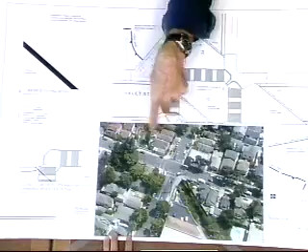Okay, so what's being proposed is construction of the entire bridge and deck, essentially the intersection of Haley and De La Vina, which is what we've shown you.

So I will just go over some of the detail elements, much of which we've shown you in the past. Again, this is... where am I? Yeah, where's downstream? Here we are - this is the downstream side. So the entire intersection is being reconstructed, as I indicated.

This will be the downstream bridge railing and the upstream bridge railing. The railing design itself has already been approved, and just for the sake of review, this is the design that's incorporated in the final plans. This was already signed off, and I should point out that this will all be done in plain gray concrete, which is in contrast to what's being proposed on the deck of the sidewalk, which is a Mesa buff color matching the Chapala Street design guidelines, which is what we'd agreed to.

Can I ask a quick question? Yes. Is this a relief or a shadow? Yeah, these are reliefs.

This is a shadow relief of various steps. This particular configuration of the date, or what ends up being constructed, reflects the historic date that's on there now, as I remember.

Yes, in terms of font, font size and size. So this looks to be flush right through here, which is this and this. Yes, this and this, and then this looks to be a one recess, and this looks to be a double.

Where's the second? So as we start from the bridge deck here, this first band here is flush with the bridge rail. This band here is the first. This band here is, I guess, that recess. We've got 1 and 2. Is that right? 1, 2, 3. 1, 2, 3. You're just missing a line.

But this looks all in one plane. In order to do that you'd have to have enough space for that. So would this then just come straight down? Right here, it looks like it would, yeah. Okay, so this section would be here.

And are those perforations, or are they? You're talking about in this field here - yes, this is daylight all the way through.

Oh, there's just one depth, not two, for this to work, I guess. But he's saying that there's two, and there's going to be a line drawn vertically down here that isn't drawn on the plans. Which way do you want to go with it? It's got to be one or the other.

That would make this one a double depth, and this a single depth. In order to accommodate this, we could have one at 8 inches, and then the remainder would have to be at the same depth in this zone here. So I guess we'll have to rethink this. It works here, but we don't have enough room here. So I don't see it being boxed out like this, no.

Okay, so it's just going to be one reveal, the way Chris drew it. Okay, and what would that depth be? Just to talk about it and note it on the plans - is that an inch and a half? An inch and a half. Couldn't it be 3?

Pretty thick. There's a lot going on inside this bridge rail. There's structural considerations. So as we come into a 3-inch cantilever, this rail, which is pretty substantial, is starting to be undercut by quite a bit.

Okay, so that is the railing design. And then as a review, the corner sidewalk paving, all four corners, has this 4-foot by 4-foot diagonal score with ceramic tile insets.

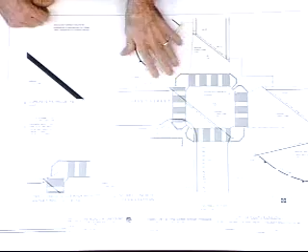And if you remember, what was being proposed and was accepted by the board was that we were going to go to VAPP, Visual Arts and Public Places Committee, and we were going to initiate an art exercise whereby local school children would take 4x4 ceramic tiles, paint them, glaze them, and fire them, with designs reflecting the fact that Mission Creek is running underneath here. That's what's been proposed all along. And so we can come back with some examples of that if you like.

Again, the deck itself is a mesa buff - it's sort of a real pale color in this area here, I'm talking about this. So this is a contrasting color to the deck.

I mean, it's integral color matching the Chapala Street design guidelines, and that's what we talked about. This contrasting to the deck - this is the deck, right? Well, this is - yeah, this is the bridge deck. And this will be concrete, exposed concrete.

Okay, so you've got asphalt to here. Right, and then if you remember, we had another little sort of art element - a 12-inch wide band of plain concrete on either side of the bridge deck, and that would be given to an artist too to do sort of a bas relief, artistic design reflecting creek-like elements as well. That's the intent.

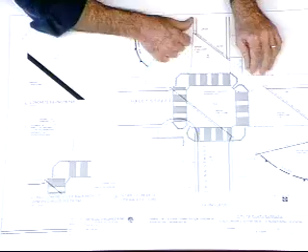Then I should point out too that, although they're not shown on my plans, but you'll probably find them in there, there will be both street lighting at this corner and this corner, in addition to traffic signal poles, and you probably find them in there.

And just for your benefit, this is design proposed as sort of the city standard with the composite concrete poles and the Lumec Domus fixture. All right, that'll be integrated as part of this overall design.

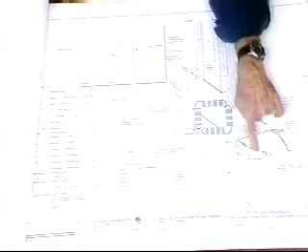In addition to the bridge structure itself, there will be transition walls here, here, here, and here. As indicated before, they will be constructed with concrete with an ornamental form liner that will result in this look. This has not this cap though—it'll have a large stone-like cap with a 2-inch reveal on the creek side.

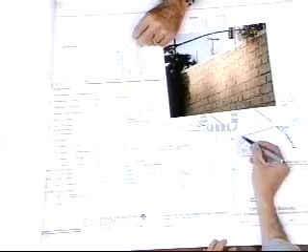This is what we're using down at the Cabrillo Bridge Project, which was approved most recently by HLC. This is essentially what it looks like. This reflects the historic sandstone block that's up and down, here and here, on all four corners. They're called transition walls because we're transitioning back into the creek corridor.

I think that takes care of most of the major hardscape elements. I should point out there is also metal fencing being proposed. We have to be able to secure these areas and provide an opportunity to keep people from getting in here and falling into the creek. What's being proposed by the city is 6-foot high black chain link that comes from here.

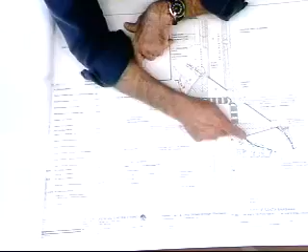At the back of the sidewalk and then down here at the edge of the transition wall, and also at this location here. Also at the top, all the transition walls have chain link along the top, and then at the back of the sidewalk here, down to here, interfacing with existing board fence, which is the property of the private landowner there. And on this side, there is existing board fence.

I don't know if we have pictures of that, but maybe show it now. We certainly do here. It's a 6-foot board fence, like 1 by 12s—I think they are 1 by 10s. That will come, it's not shown on my plans, it's shown on the civil plans, but this is the board fence here.

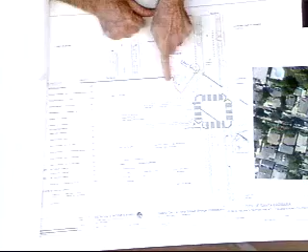And it'll come here, then down behind the last pilaster of the concrete railing, and then along the transition wall, like this one. Right now there's an existing block wall here, and that'll stay, and then they'll construct a new board fence at the top of this transition wall here. So these will be private property spaces here and here, and adjacent to this one here.

Can I confirm—not only is there a 6-foot fence here and here, but that 6-foot fence would also exist here and here? That's correct. These are board, wooden fences, and this is wooden here too. Today there's an existing concrete sound wall here, and that sound wall will be reconstructed to secure this property.

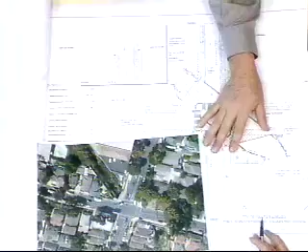So you're landscaping behind the 6-foot high fence in these cases, yes. Why the fence in front of the landscaping? Well, there's a concern from the folks in the neighborhood to secure these spots so that transient folks don't set up residence right here. That's the purpose for the front fence. Certainly the back fence—we've got fairly high transition walls that you would need to protect folks from, because this fall is on the order of 10 feet.

Are we in call for questions yet, or are they still making their presentation? Still making my presentation. I thought—sorry, I interrupted. Okay, what's being proposed in terms of fencing.

This is the planting plan as well. I think it sort of speaks for itself. Essentially what we're doing is a riparian planting. We have sycamores, and per one of the comments, there's an oak tree that'll go here at this little triangle. If you look at the plans, you'll see all the sizes are 1 gallon, because it's our intention to contract grow the material so that we will have genetic purity in terms of the proposed plant materials, not unlike what we're doing down at the Cabrillo Bridge project.

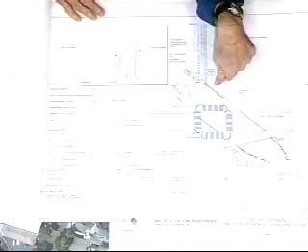So we just didn't want to use conventional nursery stock—we wanted to make this an authentic riparian revegetation plan. In addition, we have standard 24-inch box trees on Haley: Stenocarpus sinuatus, the firewheel tree, here and here, augmenting what's there with the same species. And up and down on De La Vina Street, we have a specimen to match the Podocarpus that exists there now.

And in the parkway strips, as indicated by this diagonal hatch at these locations, that would be stabilized DG. All the trees in the street would have root control barriers. This is just irrigation and detail. I think that completes the presentation—open to questions now.

Do we have a public comment?

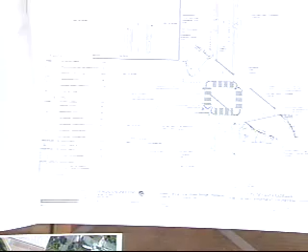Opening for public comment. We have one letter in opposition from Ms. Paula Westbury. Seeing no one in the audience, I'll close that portion and bring it back to the board for questions.

I guess our first question is, Dawn, you had a question? Actually, they kind of answered it. Mine's going to turn into a comment. I did have one other question, but go ahead, Chris. Can I make one more comment? It has to do with crosswalks.

I think there was a request to maybe redesign them, but based on conversations the city has had with transportation, and given the number of kids that traverse this area, the city preferred to keep a more conventional standard crosswalk configuration, since anything different might invite confusion, especially given the school buses and city buses serving school children along here. They thought it best to stay with standard convention considering the heavy volume of bus riders at this location. And this is painted striping? That's right.

Okay, thank you. Other questions on the board? Keith, do you have a detail of the relationship of the chain link on top of the transition wall? It's immediately in back of the transition wall. The transition wall is a reinforced concrete wall, so it butts right up against the back of it. I should point out that the wall terminates behind the pilaster at this location, so it doesn't come up at the end of it. And I believe there's going to be a gate shown here too at some point.

Was there any cabinet furniture, i.e. trash cans, included on this project? The trash receptacles are hard to see, but here's one in this very foreground. Those are going to be maintained. Where were they located on the plan? I didn't see them, they might be too small. They're not shown on that plan. They call it cabinet furniture? Oh, that's for traffic lights, those are existing and will remain. The trash can, one of them, is the one that was in that picture right by the bus stop, right here. That's the one that comes to mind offhand.

Is there any near where the creek would be, on either side where people would walk by the creek, to keep them from throwing trash into the creek? I suppose that could be included. I think you're talking corner about like this. There's plenty of room, I think that's a good suggestion. City of course has their standard trash cans, so just order another trash can as part of these plans, sure.

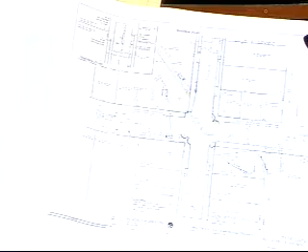I have one question. Just for David, when you mentioned the arts program was going to do a glazed ceramic 4x4 tile, is that going to be too slippery? I think we'll probably integrate some sort of non-skid finish on it, which you can do in the glaze. Okay, yeah, I'm aware of that. We'll make sure of that.

And then the diagonal is just that buff-colored concrete? The diagonal in the street? Yes, that buff-colored, Mesa buff and Mesa colors. Which is what you see on Chapala Street now. Right. Other questions, Mr. Chair?

So David, we're trying to figure out the significance of talking about riparian plants when, in fact, that whole planter appears to be at sidewalk level, and it's really not related to any natural riparian environment.

Are we... this does slope down, does it not, Scott? It has a small grade across it here, but it's certainly not down at, say, the elevation of the water surface. It's not even close to the creek?

No, right. Well, this is something I think the city is promoting as well. I've done projects—there's one down by the railroad station on the other side of the creek—and we're probably 15 feet above the water, yet we're being asked, along a 20-foot buffer, to provide riparian plantings. So I wasn't going to ignore that fact.

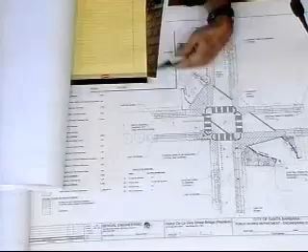So this is our best effort, particularly in an area like this that's going to get little or no maintenance over the long run. We'd like to see it have some relationship to the creek. Ultimately, if the Corps of Engineers comes in and widens the right-of-way of Mission Creek, all the planting on either side is going to be native riparian material. So I'm just trying to be consistent with that.

And so even though you're trying to create a riparian environment, you're still proposing irrigation? Well, at least initially, yeah.

The work we're doing down at Cabrillo, just adjacent to the parking lot at the beach house, on the north side of Mission Creek, we have drip irrigation in there. Then south, downstream of the bridge at Cabrillo, we have an irrigation system set up for the establishment of all plant materials—not to say we can't turn it off later on. That's the way it's done, based on my most recent experience doing this kind of work.

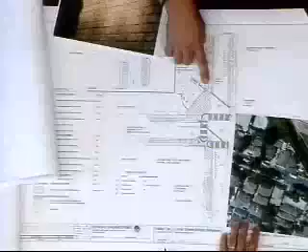You just mentioned the oak tree on the De La Vina side, that one right there, that the fence is going around. Is there another fence for protection from the creek? Originally, the sound wall that we see in this aerial photo, when I say originally, today there's a sound wall that butts up against the bridge rail. I don't know if you can see it, it's in this little tiny picture right here. Can you see how the sound wall is touching the bridge rail? Yeah. What we're going to do here is terminate the sound wall at this point, and it's going to turn along this purple line here, so that we have a way to get at that tree to maintain it. Then this little space right here is a chunk of chain link fence, so we can get at it, between here and here. Right, so there's that, and that's being proposed at 6 feet. Right, to match the wall. It'll have a gate on it to match, or something? Yeah. Okay.

Okay, comments. Mr. Chair, I still have a question.

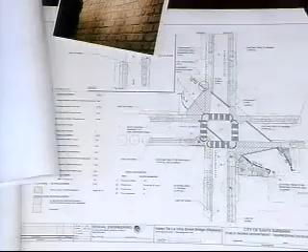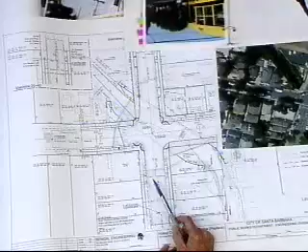Okay, Gary. Yeah, it looks to me like on 136 and 132 West Haley Street, you're going to be removing some fences, and it looks like there's 6-foot fences. 136 West Haley is on the upstream side of the bridge. I'll make sure everybody's with me here. This way is uphill towards the mountains, Brownie's Market, stream going this way. This parcel right here is 136 West Haley. Next door to it, towards Chapala Street, is 132 West Haley. In regard to removing the fences, the building on this property is being purchased. Are you aware of that? No. Okay, the whole parcel is purchased by the city for this job, and consequently the fences will be removed so that we can have room to stage. But afterwards, this fence that goes back in will be just like it is today, which is primarily only about 3 feet high, or 3 or 4 feet high. Next door to it is a 6-foot fence. And how far is that 6-foot fence off the property line? It's right on the property line. And that property's not being purchased, right? Right, that's the 132. Is that the one with the dog? That's the one with the dog, yeah.

Is that why you were asking that question? There's a mean dog, maybe more than one, behind that fence. I'm asking because of how close that fence is to the sidewalk, right up onto it. But they're not doing anything on that parcel.

We're removing the fence in order to reprofile the roadway, to get it to match the bridge. So yes, we're removing the fence, but the one that goes back in will be just like the existing one. Well, the fence is non-conforming, is it not? Yep.

It's a non-conforming fence. How tall is it? I think it's on the order of 6 feet. Oh, it is, okay. It's not conforming. It'll have to be dropped down to 42 inches.

Yeah, I think from right-of-way negotiations with the neighborhood, in order to come to terms with this property owner, I believe this is the deal that you needed to make with the owner, right, James? That was part of the right-of-way negotiations.

Just to clarify, the deal was the owner knows it's going to be a 42-inch high fence. At the end of the day, other way around -- we wanted to go to 42 inches, right? 42 inch, yeah, 42 inch high fence. That's what we wanted to put in, but we were heading for trouble.

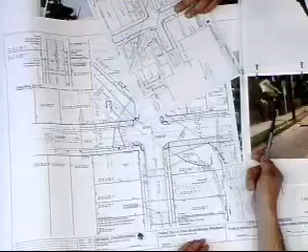During construction, we heard about those dogs. On this green line here -- I don't know if you can see it -- this is a temporary construction easement. We're going to build a temporary chain link fence to contain those pets along this line. Our contractor is going to do that. Afterwards, the way the project is set up right now, the fence will be built right back in the exact same configuration it is in.

I just don't see how the city's going to allow you to do that with your permit, because everybody else has to lower their fences during construction. Right, so I think you're going to need a mod.

Well, actually, why don't we just say that this is a staff deal and not an ABR issue to resolve? It's an aesthetic deal. I think it adds blight to that corner.

Well, one thing he said was that the homeowner was going to be building back the fence. No, his contractor is building it back -- it's part of their deal, part of their contract, part of the scope of work, to allow them access to the site.

I'm not really opposed to the 6 foot high fence myself, but I'd like to see some relief and some landscaping on it. If it was covered with creeping fig or something like that, it would look green rather than a tagging wall. I think it would be a little bit nicer. But if it's a fence right on the sidewalk, I think it adds to blight in the neighborhood.

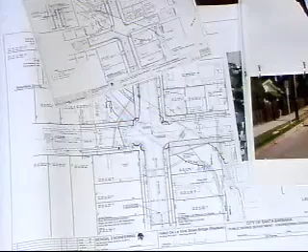This is what we have. Exactly. Of course, if that property's ever sold, zoning would make them remove it, or at least knock it down. Or if any work was done -- which there is, which is what's triggering all this.

We'll just bring it up in the minutes. I think you guys will have to deal with that in the permitting process. I think we'll have to defer to the city on that -- they're the ones that headed up the negotiations with the property owners.

So, although this isn't part of your question, the same creeping fig idea is incorporated where we can, on 513, where we're going to have a concrete wall right there. That fig is included in the project for that exact purpose. Yeah, it is.

Mr. Chairman, I have a question. On the buff tile, can we make a comment on that, or has that already been approved and set in stone? I'm a bit confused.

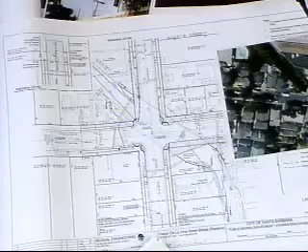The minutes said we were comfortable with the coloration we were going for. By coloration, I mean the pattern itself, the overall design of where the tiles are. It's not really tile, it's concrete. Well, the concrete patterns -- the concrete color is to match the Chapala Street color and pattern. That's what we have. So can we comment on the overall design of it? That was my question.

Okay, so if this is the color and pattern that we have at Chapala Street. I'm fine with the color and pattern. I'm talking about the overall layout of it, how it extends. I'd say go ahead and comment.

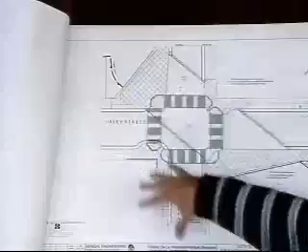We don't even know there's a bridge over there. This is kind of clean, and here's an intersection. How do we make this intersection look more exciting, even though we don't see the bridge? This being artwork, I don't have a problem with all this. My concern is this finger going out here and this floating over here. Is there some way we can make this look more like a four-corner intersection? That's just an observation I'm asking, and I'd float that to the landscape architects to see if they have an issue with that. That's just my question.

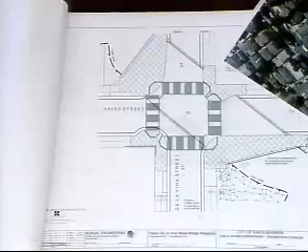Well, I think you bring up a good point, but given the constraints we have in terms of private properties, it's a little difficult. If we were working with a blank slate, I'd say fine, we could do that. But was there a way we could still have concrete coming here and make this look more like a corner? I'm just trying to throw something out and let them jump in if I'm out of bounds here.

Well, I think that portion of the review we actually went through in the earlier stage, when we had a lot of discussion on the odd shapes that were happening. I think we all came to a consensus that we have a difficult situation to work with here, and the board had reached a consensus that what they are proposing now in terms of the massing was acceptable. Okay, that was my question, so we've passed beyond that stage, but I understand where you are. Am I right? That's what I recall, that we went over that in quite a lot of detail.

But for the sake of discussion, I think this is a vast improvement over what's there now. One thing we notice is you can't even tell there's a creek running under here, that there's a bridge. The fact that we're taking this house out and reinforcing the visual aspect of the bridge railings gives a much nicer relationship between the two, such that you can actually read that it is a bridge. And the fact that we have a concrete deck as opposed to everything being asphalt will help reinforce that. And the fact that it's off center, the way the creek comes here and then slides back here, makes it tough.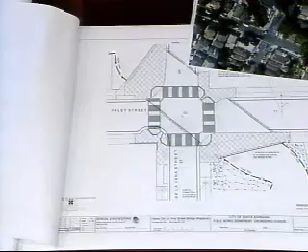Okay, Darren. I'm very supportive of the city's environmental policies and their direction for planting native and riparian vegetation. However, I do feel for this project, at this time, we have not started the project to turn this into a widened creek. We have, though, in Cabrillo.

We have? Yeah, okay, Cabrillo, just last week we got HLC approved. It's like a total riparian planting down there, not like what we did at Borough Beach. So what you're saying is this section is going to follow that in a timely manner? Because for me, reviewing this, we're not looking at an application to turn this into a riparian habitat. It's not there yet. That's not what's on the table. That's not the project we're reviewing. We're reviewing walls, fences, bridge, hardscape, and landscaping.

Correct. I'm kind of struggling here because if I'm asked to believe what's going to happen in the future, I look at it one way. If I'm looking at what's on the table today, I look at it differently. So what's on the table today, my comment about the landscaping is, even though I'm very supportive of the riparian palette and direction, the landscape opportunities in this project, as shown on the plan, really relate to the urban neighborhood.

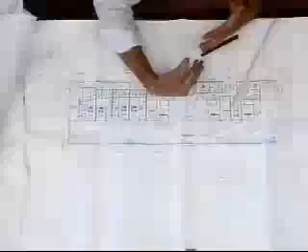We have a block up at this end where we're right at the zero property line—that's our northern property boundary—and then the rest of the neighborhood starts to fall away and has more setback. We looked at that and saw the opportunity to essentially establish a line for ourselves from the corner of this building to the corner of that building, and formulate a setback line to establish how to approach and fit in. Keeping in mind this is a C2 zone, and the requirements in this zone are a zero setback, so what we did was apply an R3 setback at a minimum on all sides except where we already have a zero setback in respect of the neighborhood.

We also went away from the double-loaded corridor and went to a single access point down this side. What that did was help pull us away from these buildings. We now are against this wall, that's the zero lot line on the north, and then putting a break between two buildings rather than one, so that there would be ample light into this light well.

This light well is a slightly different case where we've provided a light well, which you'll see in our massing wedding cakes back up and away so that the light, and we'll have an analysis here in a moment that shows the light going into this light well. By the way, the existing light wells are slightly different in the field, so we'll get into that a little bit more too. These are now a mixed-use situation.

I shouldn't say mixed-use so much as this is the Santa Barbara approach to live-work, where we don't have communicating access from the commercial space in these three units. Each of these three units is a two-bedroom unit. The rest of these units, the four units at the back, are one-bedroom.

One of the things that we've done, and we've checked this out with the parking people and traffic folks, each of these garages is a tandem parking garage so that there's a device for stacking. You probably started to see this more and more, and so I have the details on that.

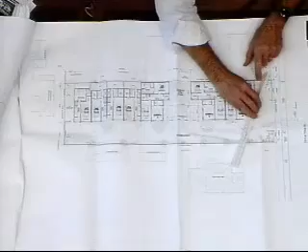We've taken, like I say, the opportunity, and you'll see this, I think, a little bit later in the illustration, of looking at the texture of the neighborhood. There's right now a hedge that goes around this side. There's already a small wall here and here existing. And we've taken that kind of concept and some hedging into account for the future look and feel of the building. And again, what we tried to do was mass against the existing building.

Here we have a duplex at the back. Actually, it's a residence. I'm not certain it's a duplex, but there's a residence at the back. Kept a 10-foot setback at this property line and yards.

In terms of statistics as compared with the previous project, it's a 21% decrease in the gross area of the building, a 10% decrease in the footprint, and a 125% increase in landscaping compared to the other one.

So that single loaded aspect really helped, and also going to the single car stacked garages helped a lot with the texture, the feel on the land.

As we step up then in the building, we also cake back at this end. I want to point that out at all ends. So you'll see more up.

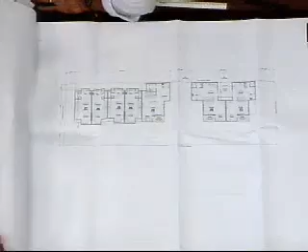Should I turn that off? Yes, turn it off. There you go.

We have living at the second floor. This is cut back in already, and these have cut back in a bit. And then we have at the third floor bedrooms.

Now, we met with our office, met with the property owners both to the north and south of us, three different times. And as recently as earlier this week, we had some communications with the owner over here, and we'll talk about some options that come up here still trying to deal with these light wells. But this was what we presented to you, and I have one of the things in that packet that I handed out, another option in working with the owners.

What you'll notice also on this is that over at the west end, there's not a third floor. At this point now, we're back 28 feet plus, so we don't go up to a third floor at the back to open this up on this back side. So that's also caking up and caking up.

We move into then some illustrations on A3.0, and this is the massing before the option that I'm going to talk about. Coming down the De La Vina Street side, kind of upside down to it, but this is the pine tree that was in question.

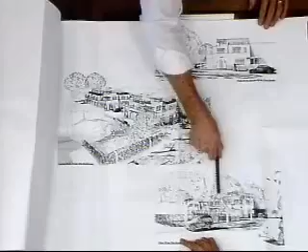You'll see in the plan views we did ease back from the pine tree. We've eased back from the south side in particular, and we've organized the building around this well at this side and staying on the blank walls of the larger building to our north.

At the front edge, what we're planning on doing is continuing on with this hedge concept that ties into the hedge that's already existing next door, and in fact there is an existing fence right about there. Yeah.

More illustrations from different locales, closer in and on the site, but we're taking our cues architecturally. I handed you an update on this, but architecturally, this is a lot of reference to Irving Gill types of architecture, and that's this set.

So this is our real touchstone for history in Southern California, with Irving Gill and some Schindler, with the lighter look for the top of the building.

Where our offices are located, this is Santa Barbara, and our office is up here at the Riviera Research Park. But from around town, if you look at the character of this neighborhood, it's a lot all over the place. This is what we think was the appropriate way to meld in with that neighborhood.

You'll see this sense of the arch form and the Irving Gill take on modern Spanish style, with the lighter weight so that we can get a mix of heavier towards the bottom, a splash of color in these tile forms that we're anticipating, plaster, and then a siding effect and a lighter weight floating at the top. That's the vernacular we're trying to emulate here.

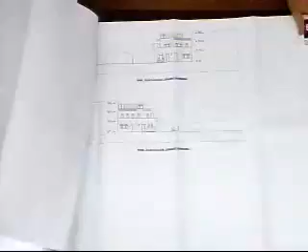Excuse me. See what I didn't collect up on. I think that covers it, except for an option that we wanted to talk about.

In my set, we brought in a building section to show this light well aspect too, because we wanted to study that closer. That's part of the sheets that I just handed out.

Regardless of which option we get to, and I'll explain the difference between the two in a moment, this section illustrates what the well would be in between the buildings, related to the well of the existing building.

One of the things we looked at was if this were a residential site, which it isn't, but if it were, what are the sightline setbacks required for an adjacent site? That's this dotted line right here. What we've set up in our actual design is actually lower and more accessible than that would have been if applicable. We have a winter and a summer, and we got dimensions from the neighbor next door and applied those to the site here.

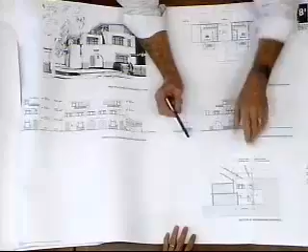There was a concern about, at the upper floor of this unit, having this deck potentially be a privacy issue to this light well, looking back down into the offices surrounding this.

Additionally, early on our first efforts had these blinders, if you will, right next to this light well. We backed them off, and there's always been a concern about the lateral effect of light as well. So to mitigate that, in this alternate, this has retreated backward to this line so there's less of that occurring.

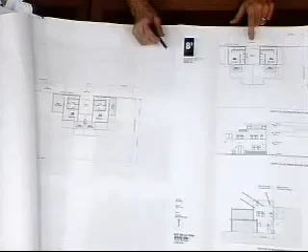There's less of a blinder here. Now it's unfortunate these wells are here, and in fact at this light well there are, I believe, four skylights over the top of it, but I don't know why—those could also be opened up. Unfortunately, it's a zero lot line condition, and I don't think you'd get away with building such a thing these days. But it is what it is, and we've designed around this to the best of our ability, taking into account the balancing act of the neighborhood in all other respects.

So that's where we stand today, and this is an alternative we're prepared to go forward with. The outcome of that in elevation is actually this, which is a little bit nicer architecturally. It takes another 100 feet out of each of these units approximately, but it also cleans this up a bit as it tiers down. So there's not a notch going forward that you would have seen.

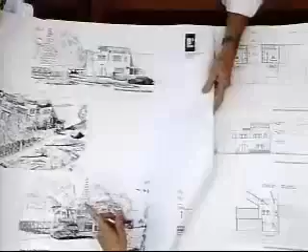And then the other units at the third level, are they similar? And they would retain the option A, which would be the first one? Yeah, these 2 units at the front, which were around this light well, are the only ones that are the change in the alternate we're looking at right now. Further back, because we've been able to get a wider space in this one, we were able to. It wasn't as big of an issue.

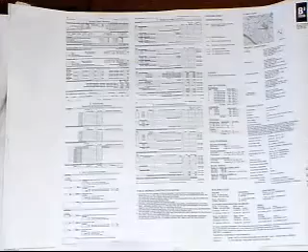Members of the ABR, Keith Rivera, the new architect for this project, and I have been working through many problems associated with the previous architect's submittal, and thanks to Keith and the owners, we've made giant strides toward what I feel would be a good project.

As suggested by the ABR at the two previous meetings, pulling the units to the north property line against the 829 office building is a preferable solution, providing the existing two wall openings on the property line remain open. These two wall openings to atriums provide much needed and appreciated southerly light to 12 offices, openable windows with natural ventilation to 9 of the offices, and a 105 square foot balcony with 3 French doors.

The building, a 55-year-old produce warehouse, was converted by me 30 years ago at a time when natural ventilation and light was very uncommon in offices. I sacrificed 320 square feet of office space, reducing the rental income, to provide offices with these assets, substantially reducing the light and air conditioning loads required for the building, which provides less expensive utility costs for the tenants. The closing off of light and ventilation will increase the electrical bills paid by the tenants, no small matter now nor in the future.

While this proposed project retains acceptable openness to the westerly atrium, the easterly atrium is severely closed off with 3-story buildings on 2 sides, approximately 12 inches from each side opening, and 2 stories on the third. I might add that the third floor building is roughly 5 to 6 feet higher than my highest parapet, which is not what's accurately represented on these drawings.

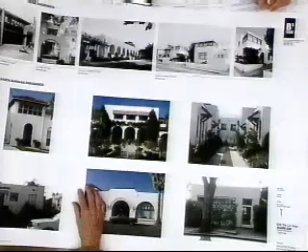So what you're doing is, just so I get this straight, you're mixing a Spanish type of plaster architecture with a Schindler modernist type on the third level. Right. We think it also plays off of this feel that you're getting from the Irving Gill buildings, which was a California approach to modernizing the feel of a Spanish-style building.

Thanks. Can I segue off that same question? Also, I was wondering how these architectural styles that you've chosen are examples or precedents, how the third story element comes into play here, because I don't really see that.

Well, there is actually an extra story of height in this building, if you will. It's a matter of if you're talking size, bulk, and scale, but in terms of usable space, it's not there. I know this building quite well, and you can see this lower—there's essentially an extra story's worth of volume and height and size to that building.

Other questions? Yeah, I have 2 questions, Jim. The tile out in front of the arched wall, is that the same tile that runs throughout the interior of the court?

Show the elevations. You're talking about in plan view? Elevation view. There was an elevation. What page? It's probably off the other. What number? It was on this sheet. Just bringing it forward. This one here?

Basically, I was talking about this tile that's in this part at the entrance. Does that continue the same tile that's... Yeah, so they would have a variety. We haven't selected colors on them, but they're all ceramic tile.

Yes. And then the other question, according to the plan view, it looks like these arches are only 6 inches deep. Is that correct? The plan view is going to be the most correct. That's right, it said about 6 inches, approximately.

Jim? Yes, Paul. The idea or the notion of having stacked auto lifters as your tandem parking—has transportation signed off on that, and city staff has said that that's an acceptable two-car garage? That's correct, yes.

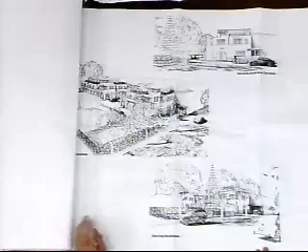Okay, other questions? Okay, no questions? Yep, Sarah?

Did you study having the trash and the recycle enclosure—have you studied an alternative spot for the trash and recycle enclosure that maybe is more internal down the driveway, maybe even at the end?

Well, we could look at that. One of the things is getting the pickup people to want to come down and get there and get back, so the actual function of it from the provider is usually the issue. Well, they will come all the way—it's sometimes a little extra, but they will come all the way deep into the property. So it's a possibility. It's the same size at either end. Okay.

Can I finish? Quick question. Just noting what Mr. Sharp was saying on this building versus the third story of yours, looking at these block elevations we're seeing here—these look almost to be in line. I'm wondering, I don't know what datum he's using. We believe this to be correct, so I'm not really certain where he's deriving the information. So your estimation is no, that's not the as-built of his building? Okay, we believe that this is correct.

That yours is topping out at his parapet height then? That's right. Okay, other questions? No? Comments?

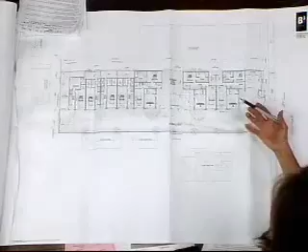These appear to be deeper than they necessarily have to be, so if these were a little bit shorter, especially these, then we could really get something like a little bulb out. I think what you run into there is these dotted lines, which are traffic department requirements. So if that's true, I would almost follow the line of travel with the planter edges, and this becomes maximum planting opportunity right there.

I don't think a fence right here is really necessary. I think that little jog of fence might really interfere with some nice flow of landscaping on the corner there. I should point out that the concept here, if you look at the illustration, will have a bit of an arbor here. One of the things on the side of this building, trying to mitigate the flat blankness of it, was we provided a little arbor right in here, and we want to get something up to help screen the flatness of that.

That's what's represented there. Also, commenting on your comment, where you showed the bulb is one thing, but that opportunity, if you see these dotted lines here, may exist more in here. That's what we would plan to do. We have no desire to put curbing in here either. These lines show a flush line, and this is all pervious paving, and we would get as much actually planted in here as we could while respecting the dictates of traffic. So it's more important to try to maximize the landscaping, especially in this front zone. That is what's more important.

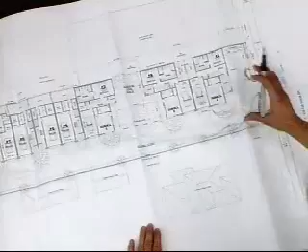My last comment, I just want to make sure Mr. Sharp's comments or concerns were at least looked at. In his third paragraph, while this proposed project retains acceptable openness to the western atrium, the eastern atrium is severely closed off with 3-story buildings on 2 sides. Therefore, I am asking for further reductions in the building mass surrounding this eastern atrium.

Did the board address that concern? Yeah, that's actually what I meant in my comment. I thought it was windows, but it was actually the comment to continue to work with the neighbors on the areas he still had concern with. Okay, so it was that area. So the eastern atrium is yet to be resolved between neighbors and project. That would be my concern. That would be this one. That's this, right? Right.

So there were two. He actually proposed the 2 third floor orientations that have different properties, and one of them narrows, widens the aperture at the end, and that seems to have some benefit. So if that's all satisfied, I may have missed that conversation, but I just didn't want to have it not in a comment at least.

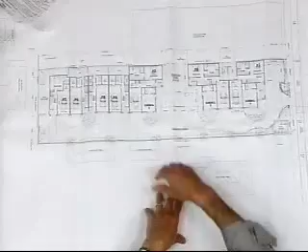The other thing is I agree with Carol on the landscaping, especially along one side where we have this long stretch of very symmetrical plantings. Some maximization of the landscaping area that could give us a bulb-out here or there to make that long corridor feel less straight and directional would be really good. I think the project overall is going in a good direction.

The massing is very good. I like option B on the 3rd floor, which creates a better aperture, a shorter distance to the light, so I like that, the B. I think most of the things we have to address here are landscaping, and we asked for maybe an alternative for trash enclosures, to see where that could possibly be.

Looking at the building elements you're incorporating, try to have them work a little more in harmony. Some of the depths you're using for the windows, a little more depth would be appreciated. Am I missing anything? The garage situation.

Personally, I'm not as opposed to it. I've seen this type of garage used not in Santa Barbara, but in Europe, many places, and people seem to use them quite well. I think it's probably something that's going to happen as the city gets more dense and space becomes more valuable. But again, as Paul phrased it, if you do go this way, there may be other opportunities you can use to maximize creatively. So I agree with him on that.

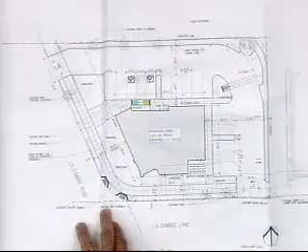As far as the landscape is concerned, there's a landscaping plan attached. You can see we're trying to preserve some existing trees on the property. There are 3 significant trees at the back on the north end, and one tree along La Cumbre Road, and 2 existing palms on La Cumbre Lane. The rest of the landscaping is new.

We're not too interested in the operations. Yeah, the floor plan is the floor plan. Okay, the 4 elevations provided.

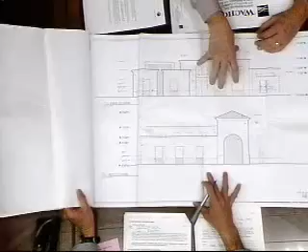The north elevation is actually the main entrance from the north side. This faces the parking lot, right? Yes. So that's this one here? That's correct. So you'll see the main entrance door here. One important concept for Wachovia's branches is that we try to maintain a two-story space, a two-story volume for the public area of the building. So on the interior, that's why you see this element here that's fairly tall.

That's also reflected in the other elevations we get to. There's a clearstory element at the back, set back from the front of the building, that provides natural light so the traditional banking lobby is lit with as much natural light as possible.

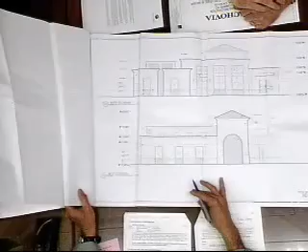The materials, we've submitted some material boards. The principal materials are plaster, with two plaster finishes and a reveal at about 36 to 42 inches high. There are tile features in these alcoves, or recesses, for the windows, and those materials have been submitted for samples. The other principal elements are...

Michelle, do we have a sample board? There should be some color attachments somewhere. I have the black and white ones with me, but I don't have the color. There we go, thank you.

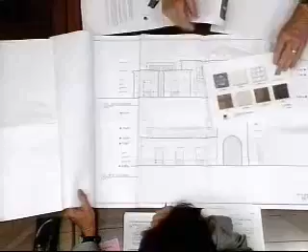This is a color copy, so I won't guarantee it's an absolutely accurate representation, but the colors are sort of traditional. Is this stucco here? That's correct. And where's this one? This is the plaster above. So we really have two tones, this is the wainscot plaster, and that's the one above, and then you have the reveal in the middle. And the tile is in here? Yes, that's the wall tile, the squares are the wall tile, and then we have a decorative tile that appears in locations like here, horizontal.

And you're proposing a one-piece mission tile roofing tile, yes. And this, is it aluminum framing? No, that's actually plaster. These are some metal canopies, I think we have two, one here above the ATM.

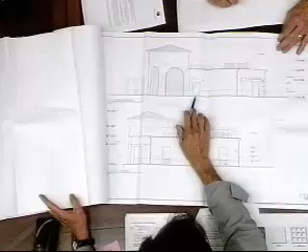We also have some wood trellis materials shown on the other elevations. Here's a wood trellis, that's right. And this is facing La Cumbre Lane. That's correct. And the east elevation facing La Cumbre Road, 26 feet high.

Do you have any relationship in height between this building and the existing building over here? We do from the photographs. The massing is probably very similar. I don't think these buildings are really taller, if you look at the photographs it's a one-story building, the AT&T next door. Just wondered how that height relates to it, because this is 26, this is 27 feet tall.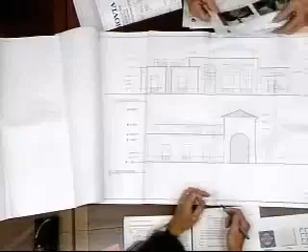The photos of the buildings, in photo number 5 in your packets, show that's the tallest element of the building down La Cumbre Lane. Looking down from our site here, I think that's probably similar in height. I don't know the exact height of the sloped roof on top, but it's probably not too much different - within a good scale relationship.

You have the elevations. This is facing La Cumbre Road, facing the back. Wood trellis - that's the same brick tile that you have, yes.

This is your landscape plan, intended to fulfill the requirements of the city. The existing trees to remain are here, and we're adding more of the same palms along La Cumbre Lane. Myoporum is the ground cover here, and Festuca - I can't read that upside down, I'm sorry. All right, that's landscape looking across.

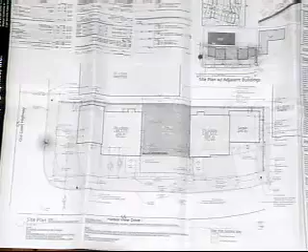Okay, so we are at the corner, 1405 Harborview Drive. Where is this? Old Coast Highway and Harborview. It fronts on the corner that is opposite Montecito Country Club and catty-corner to the tennis courts. So you're right on this corner here? Yes, on this Old Coast Road. And that road coming down here? Right. So is this one or two properties? One here, okay. And it's a duplex, or looks like a detached duplex.

Okay, so this is Old Coast Highway, this is Harborview coming down here. Actually, you can see from the photographs towards the end of the drawing package the immediate environment.

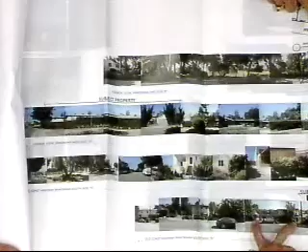As you can see along Old Coast Highway, there are quite a number of multi-unit developments, apartment buildings - that would be these here, Twin Pines, Gala. This is your project right here, subject property. Right next door is a two-story apartment complex, followed by another two-story apartment complex, followed by another one - 1, 2, 3.

Right, okay. So we have location, we have site plan.

Mr. Chair, I actually went through the minutes of the last meeting, and out of the 13, 4 of them were not positive comments in nature, but there were quite a few that would have required at least some action.

Okay, you want to call them out? Do you have a copy of these? You're looking at me like you've never seen these before, Tom. I don't believe I've got 13 comments, but well, maybe we could just go through these.

Let's go through the 4 that you think need to be addressed.

Of hearing the applicant's presentation, that gives me a lot of understanding of the project. So he probably hasn't seen it before? I don't think so. Okay, he has up to 10 minutes. I'd like that time to be used.

Right, all right, we're on the board. You want to go ahead then and make your presentation - refresh the board. Okay, these are two detached single-family structures.

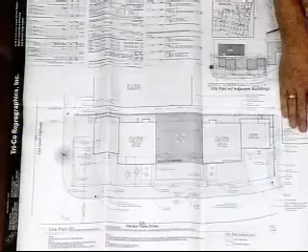The building immediately adjacent is a two-story apartment complex. Again, on the other side to the north is another duplex. The site itself is impacted by flood zone conditions, and therefore the structure to the north has needed to be raised and filled somewhat in order to meet that.

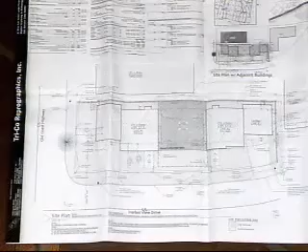The project also was required to pass the requirements based on open space sound requirements because of the adjacency of the freeway. By splitting the two units and kind of harboring the open space in between them, we were able to achieve this without having any exterior walls. Other than that, I think that's really it, my presentation.

Just after opening up, seeing no one from the public - do we have a letter? Yeah, we have a letter from Ms. Paula Westbury. Okay, thanks - in opposition. Okay, and also seeing no one from the public, I will close that portion of the agenda, bring it back to the board for questions.

Actually, Mr. Chair, if we can have Don quickly go through the items that need to go through, to refresh our memory on the motion.

The first one was - I'll just read the ones that required action. In addition, the ones that didn't require any action - I'd like to hear the motion.

Number one, the mod required for the pop-outs is technical in nature, and the second-story location does not prohibit the use of the 1,250 square foot of open space. Number two, the applicant is to verify the heights as required for natural grade per zoning ordinance. The board finds that the project does not appear too large in size, bulk, and scale.

Number three, the applicant is to study window proportions, locations, styles, and variety of uses on the east and other elevations. The board members find the use whimsical and playful.

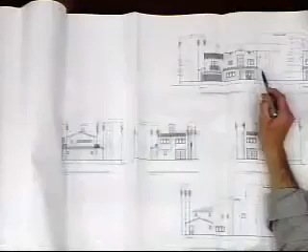Number six was study the master bedroom balconies as they appear to be cantilevered a bit too far. They did not require modifications and were adjusted minutely to meet those requirements. Where are those balconies? Right here. How far out do they come out? They're 2 feet beyond the setback. And where were they before? Inches different, just like 2 feet, 1 inch? Something like that, yeah, it was very minor.

Okay, number 7 was the rear elevation garage of Unit 1 is to match the Unit 2 garage by eliminating the recessed pop-outs. That was accomplished. That was done? Okay.

That comment was some board members prefer that the units have a less mirrored image. Did you? They're not really mirrored. The two ends are handled differently, and in response to stepping down at the edges of the property, one has a hip roof, one has a gable roof. It's a duplex, they're two brothers. It seemed appropriate to treat them very similarly.

So this is the adjacent structure. It's 2 stories, and this is 1 story, and the outdoor areas in either case are side yards. This area here is a parking area, and over here is parking and access to the garage. This is basically the garage corner of that structure. No windows on either elevation of either building.

These are kind of bathroom and bedroom windows upstairs. Where's that? It's here. So the two-story apartment building would be right here, and then this would be their parking lot. And then facing the neighbor over there is this one.

This elevation - I think the comment was to show where the windows are of the adjacent structures and how that relates to the windows of your structure. The multiple unit dwelling has a modulated system of bedrooms. There's I think 4 units up there, so they just kind of go down the row. They're not specifically related. There's 4 two-story units, and the upstairs bedrooms and bathrooms have their rear windows looking out in that direction.

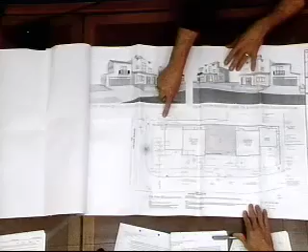This structure is a multi-unit, and they're up and down units, so that the upstairs are bedrooms, and they have bedrooms and bathrooms with very small windows that look onto this property. So bedrooms and bath.

That's what we're asking about - are there large windows opposing large windows? That's what the comment means. Is there a privacy issue? Where are those windows on the other building? There are windows marching down there. I don't think that particular window is facing any other particular window, but it's a wall of building.

The applicant just didn't address that comment in the minutes. That's all that happened, so they're not shown on the plans like they were requested. That's all the comments. Okay, questions, comments?

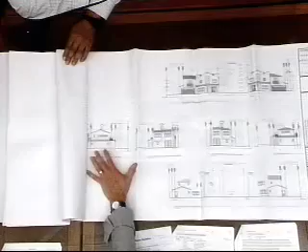Any others? Just my one thought, which I hadn't seen before so I feel a little reluctant to jump in, but I think this south elevation facing Old Coast Highway really needs work. While there may be other apartment buildings built in an earlier era, this faces a major arterial way, especially for those private homes that go up the side street here.

I think that architecturally, we need to deal with this in a more publicly sensitive way, both to the pedestrian and to the passing motorist. I think that ties in with Chris's comments on the planting at this corner, that they'd be very sensitive to that aspect. That's my feeling.

I agree with Clay, just trying to find out what's the proximity of these windows, because this is a big, large expanse right here, the three of them together, and they're not a small pair or two little pairs.

I agree with the balcony overhangs, as they seem to extend out 4 feet and they seem very shallow. It just looks like there's too much weight hanging out there, too much moment without bracketing or any obvious visual support. So I think that would need to be touched upon. That's my comments.

Okay, any other comments? Okay, sorry? No, go ahead.

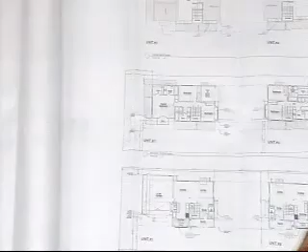I had a question and comment, because when I was reading the minutes, Tom, you said that the balcony only extended out 2 feet beyond, but it doesn't. It looks like one of the comments was that the balconies stick out 3 feet. Were there different balconies? I think the question is between how far they stick out from the building and how far they're beyond the setback.

I think what we meant, and I wasn't here either so correct me if I'm wrong, was that the comment related more to how far they stuck out from the building. So, okay, I guess I misunderstood that. So they aren't 2 feet out from the building, they're still 3+ feet out. Yeah, they're 3 foot. I feel the same way, I think they're too far out. That's my one comment.

Clay already commented on this, but Tom, I think you just need to figure out which way you want to go, because you're showing corbels and then you're showing the wrought iron, and it's not real clear what it's going to be. Well, it's a wrought iron railing, but they'll obviously need some good structural supports. My comment is that I think they are a little too deep for wrought iron railings, for that particular kind of support being under that garage door.

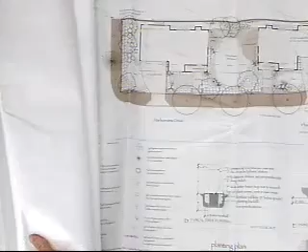Okay, comments and wrap up. I have one additional comment on the landscape - is this Unit 2 here on the north side? The corner planting between the driveway and the house is very minimal. It's just planted as society garlic, so I think we'd like to see a plant that's a little more substantial in terms of the foundation planting there.

Okay, that was it. Mr. Chair, I'll make one last comment. I agree with what Clay was saying about the windows, and that there's an understanding that there's a playfulness, but the proportions are just still a little bit out of whack. Some things are too small, and some things are too large.

From my perspective, I don't think this project is ready for preliminary approval. What I would recommend is that the applicant go and start doing some quarter-inch elevations and start dissecting the building a little bit further, understanding he's moving down the right road in the sense that he has his staff hearing officer mod taken care of. But architecturally, there are some issues that need to be resolved, and it's more than just a minimal or minute kind of tweaking that needs to go on.

It's just the next generation of thought needs to be put into the plans as well as into the architecture, so that we can see that these issues have been resolved, including the impacts onto the neighbors next door, which means showing the windows and how they relate to your building, and perhaps you're going to have to slide one of your windows if they align completely with another window on the opposite side, but we don't have that information in front of us, so I don't feel comfortable giving it preliminary approval tonight.

Thanks. Mr. Chair, I'll make a motion for a 2-week continuance. Is that okay? Okay, an indefinite continuance, back to full board. Back to full board as quickly as possible.